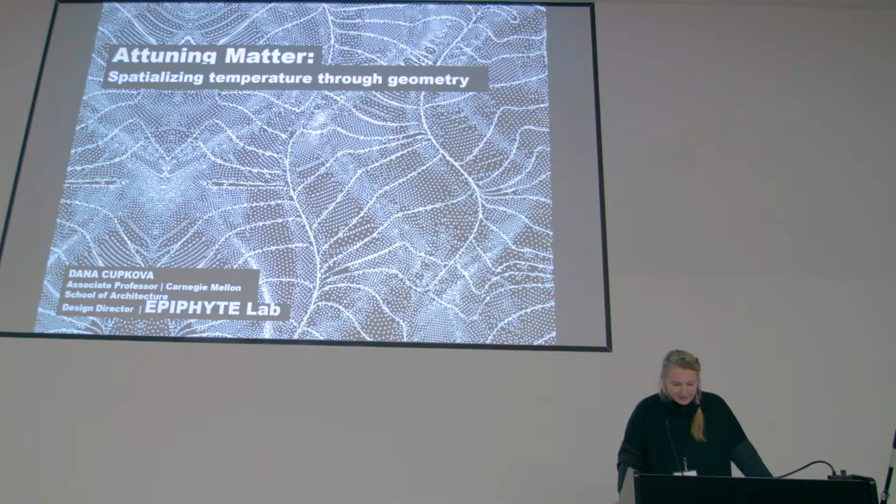I'll be talking about attunement through low-tech materials, thermal perceptions, and all things non-kinetic, just for change. I'm an architect, a designer. Concurrently with my academic position, I ran a practice, a design research collaborative called Epiphyte Lab, which is focused on the design of built environments through the lens of thermodynamic behaviors.

Truly operating between practice and academia, there is a structured yet slightly ambivalent relationship between the set of categories that want to engage context through very different formal behaviors, data metrics, and use of code, but vary in scale, type, and materiality.

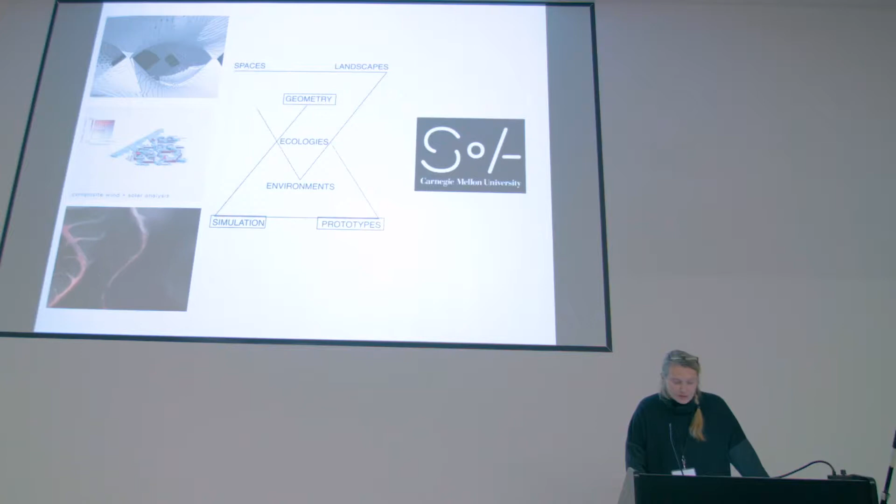On the side of the Epiphyte Lab, we produce experiences and academic research and teaching. We focus on procedures and methods that get us there, but collectively the body of work situates architecture as a kind of ecologically reactive form, primarily drawing connections, relying on simulation, relying on connections between perceptive form and its contingency on invisible forces.

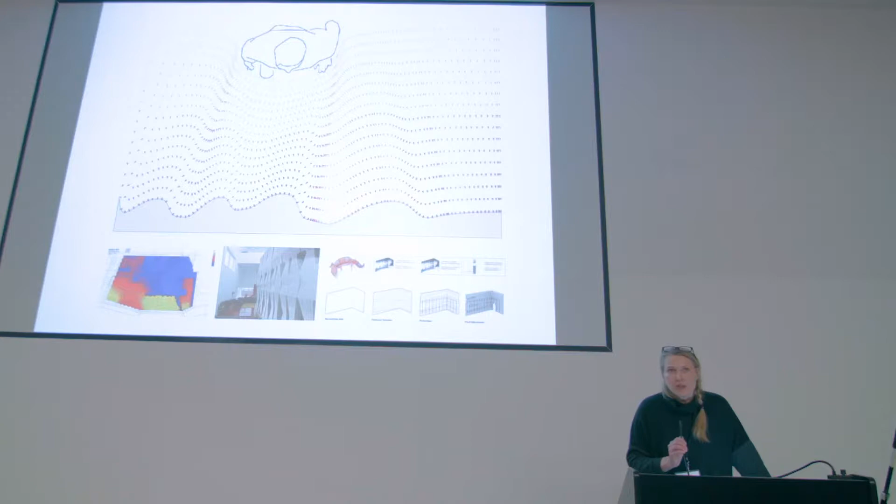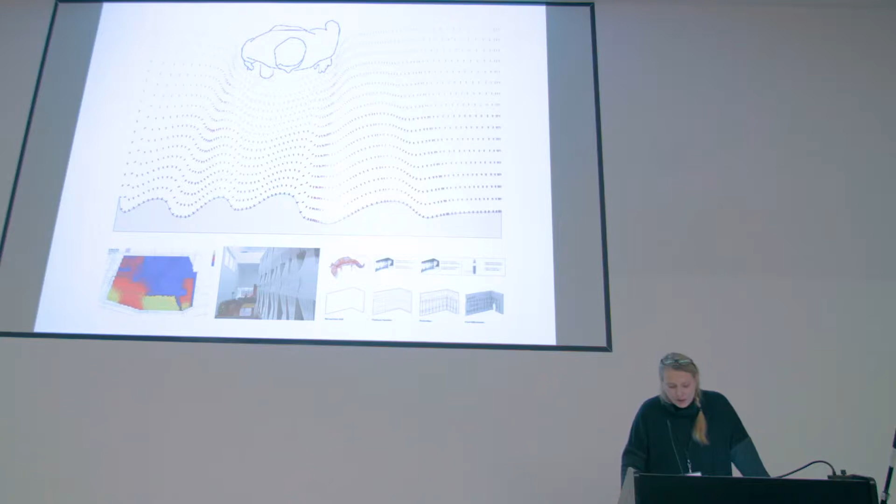Focused on energy, and energy is both empirical and perceptive. My work really looks at a definition of thermal comfort away from the industry standards that are underlined by engineering of mechanized building systems, and looking towards the capacity of architecture to trigger these perceptions through subjective experiences.

Thermal comfort is an engineering term which is based and calculated on a metabolic rate of humans. So we're already using these standards, like ASHRAE thermal comfort, which is based on scientific research into the human body. Yet, unless you are a 40-year-old white male, the building is really not designed for you. It doesn't care how you feel.

In terms of the preconceived ideas about how building systems are integrated, which Axel talked about a little bit, it's highly problematic.

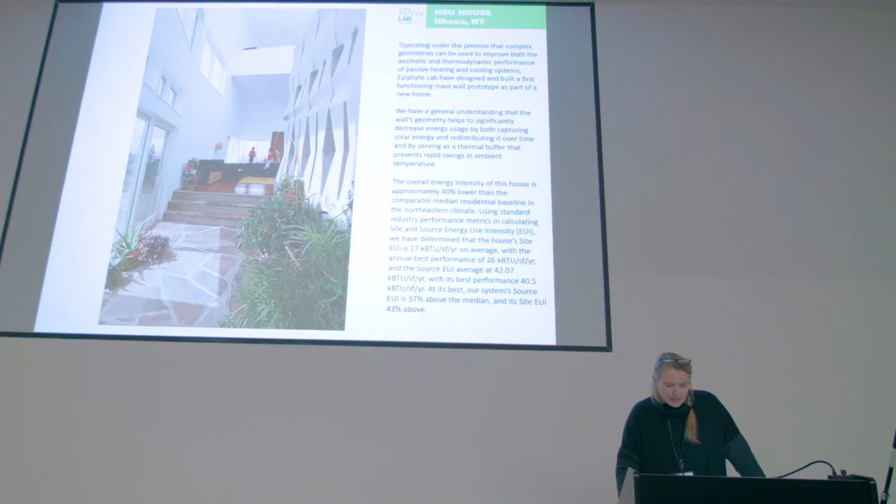This is a 9-year-old project now, HSU House, that originally served as a proof of concept and jump-started a lot of my currently funded research, primarily with industry. That looked at geometrically actuated thermal mass. This is a house which has no mechanical air conditioning, and it's cooled passively through this chunk of concrete. Ironically enough, we got a lower LEED rating for this one because we had no innovated air conditioning. That was quite interesting.

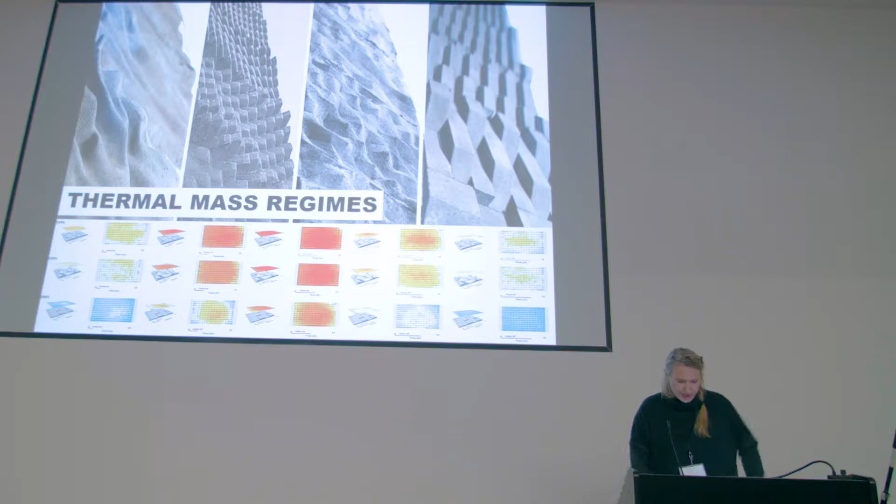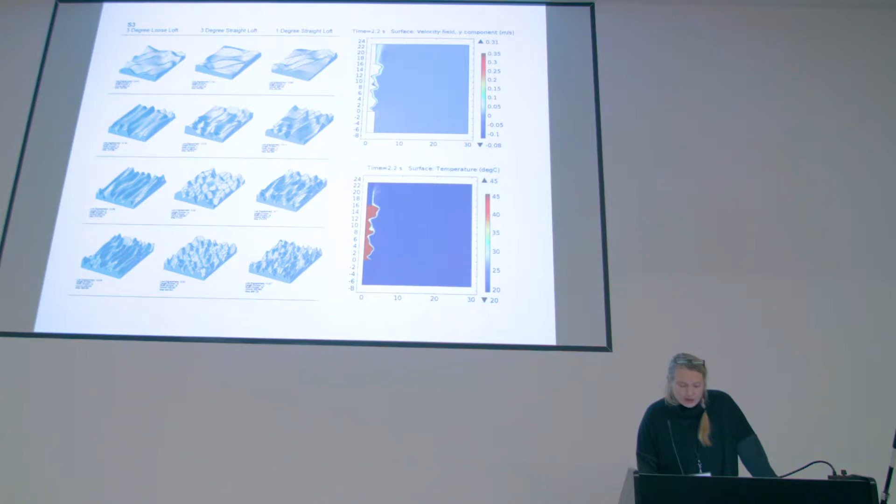So it led me to this idea that surface figuration is a significant factor in thermodynamics of passive building systems, primarily due to convection. This has been published, so I'm not going too deep into it, but through both simulation and physical testing, we're able to isolate the heat transfer coefficient of these different shaped surfaces based on geometry.

So I'm able to start associating the currently engineering method of looking at thermal mass, which doesn't really take shape into account, or a lot of the simulation, energy-based simulation, which don't take shape into consideration.

We were able to determine a basic rule set for geometrically actuated time lag that would have significant effect on environmental dynamics in regard to decreased reliance on mechanized environments.

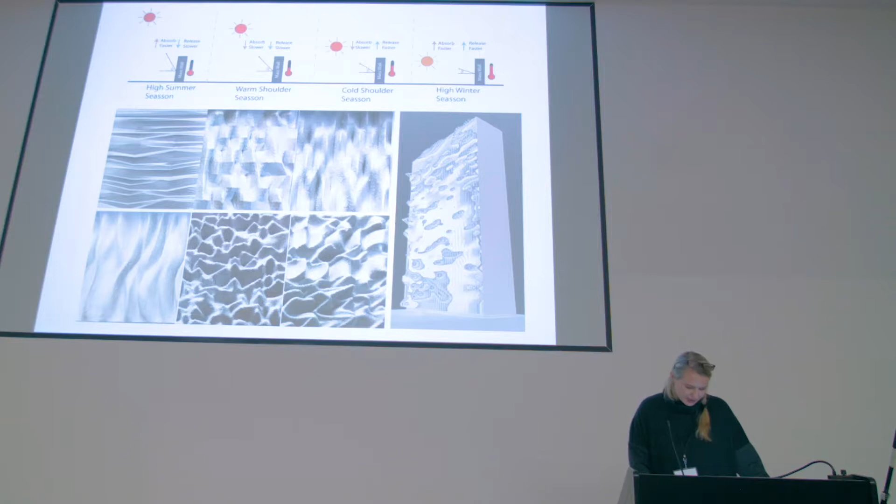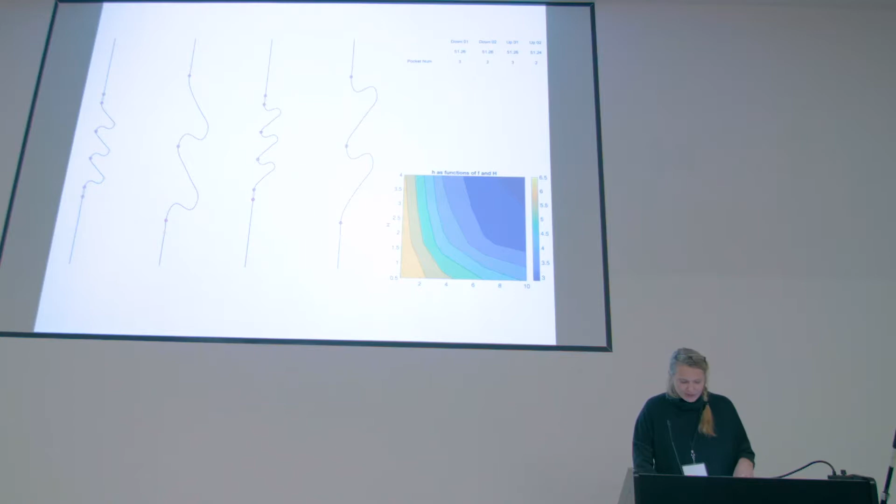Now we have the ability, and this is a new venue, to start identifying these figures and geometric trends, which there's a lot of information about, and assign them a potential thermal value, doing some statistical analysis to start generating new sets of geometries with desired thermal lag and a new set of tactile experiences. This is a new line of inquiry, where we can use machine learning as a way to start projecting some of these performances.

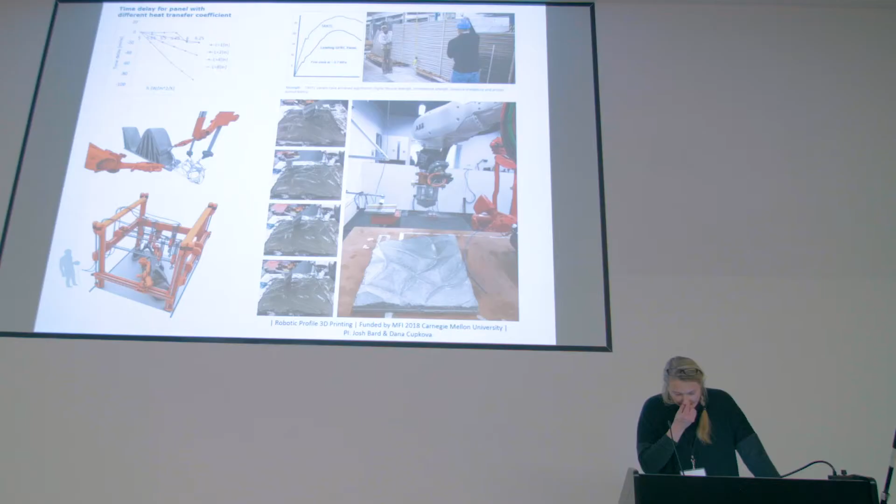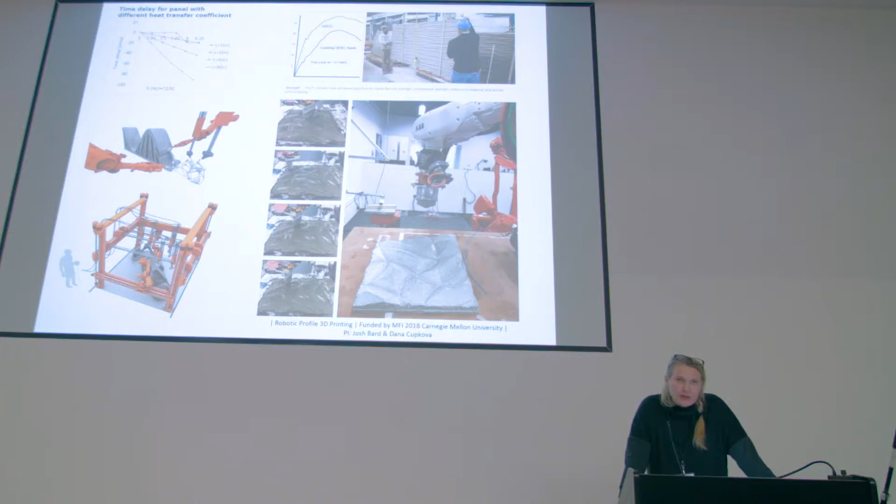This is a little bit of an ode to concrete. As you know, manufacturing of concrete has the biggest effect on carbon production and greenhouse gas production.

We collaborate with industry quite a bit. We have manufacturing innovation funding from Carnegie Mellon University. But what's ironic about concrete is that it essentially has one of the most benign embodied energy footprints on carbon per unit of material.

The main culprit in this whole problem is the cement. So we're starting to look at the holistic production of material mixtures and demolding the process of fabrication within some of the industry partners we're dealing with, so we can have a much greater impact in terms of the industry itself.

This nuanced understanding of surface tactility and thermal choreography offers two lines of material research of architecture as it relates to both ecology and technology.

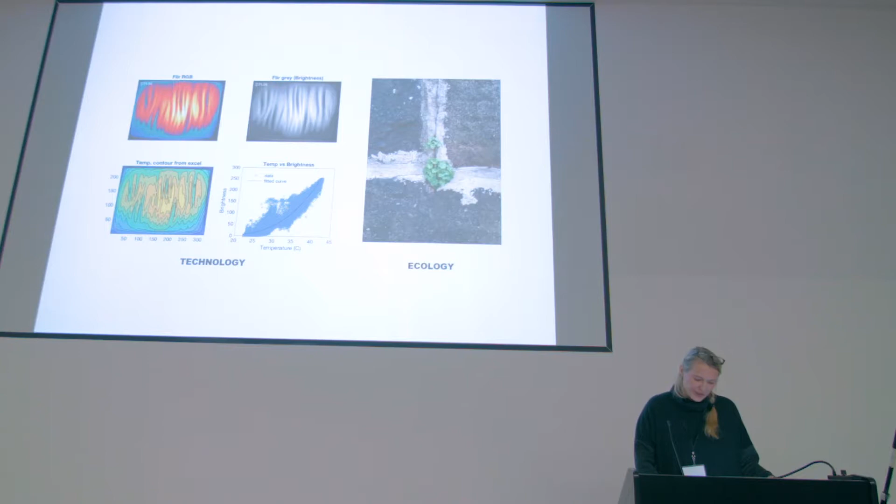So from outside in, there's a sort of opportunism of existing phenomena related to material weathering, and a lot of projects talked about this. I'm interested in shifting away from a positivist humanist concept of industrialization and investigating modes of ecological disruption into new material modes.

This is also in the context of one of our manufacturing industry partners. Their main production or research effort really goes into trying to prevent these situations. So the whole idea is, how do you start engineering materials that enable completely different kinds of porosity, ingredients, ductility, different intelligence about aesthetics, biodegradability, and a holistic ecological experience for large-scale buildings.

So that's sort of an outside-in approach. And from inside out, the other inquiry engages thermal color as a means of communication with environment—thermochromics as well—unpacking ideas of thermal comfort in buildings.

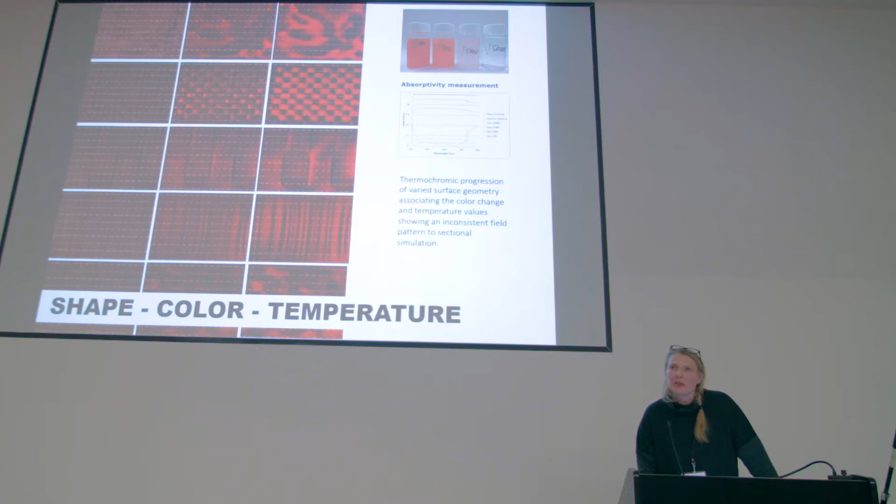The focus is really on reactive surfaces and thermal communication, proposing thermoregulation to allow architecture to operate more as a mood ring. This goes back to the idea of mechanized environments—rather than an optimized engineering system, how this can be an overlay of previously passive geometries together with these active thermal networks.

There's a possibility to create pathways and embedded connectedness to specific forms of biofeedback. This is a very interdisciplinary research agenda, using human physiology and emotiveness as a way to react or communicate with the environment itself and inform the design of material expressions.

This is a little corny, but it's a projecting of these scenarios related to human presence and a state of mind into the materiality of surfaces and spatial character.

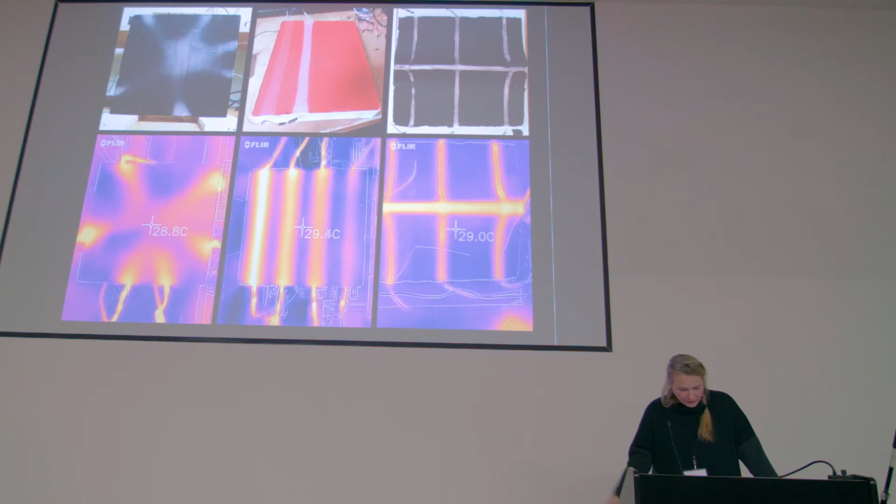This is our first functioning prototype—a piece of concrete using thermochromics and heated pathways. We're looking at a different way of producing these distributed control systems, which allowed us to set up a hierarchy of testing procedures and modeling workflows.

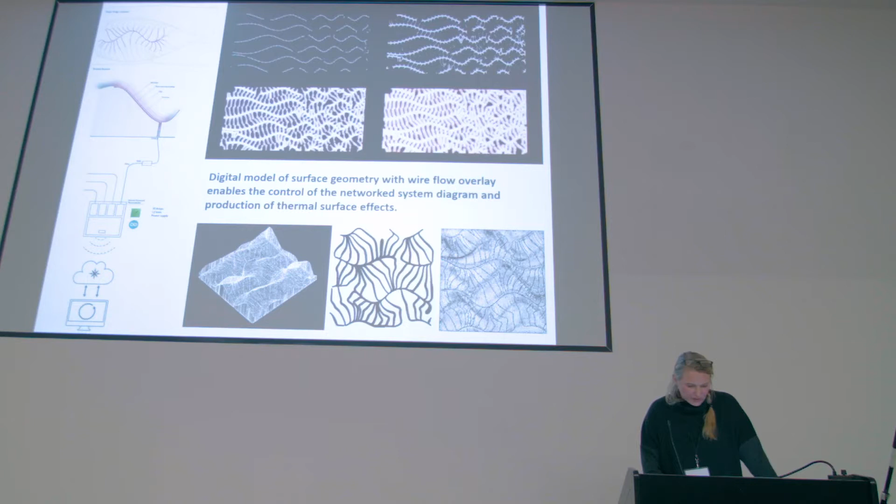This lets us simulate changes in microclimate in response to human thought, and produce more robust proof-of-concept pieces using thermochromics and programmable electromechanical controls to affect surface temperature and tactility, using a distributed matter and sensory effect rooted in thermodynamics.

This is the final prototype we currently have. The thermal pathways are currently programmed, and we're still working on this as the second part of the research—taking on the method for communication and actuation of the system.

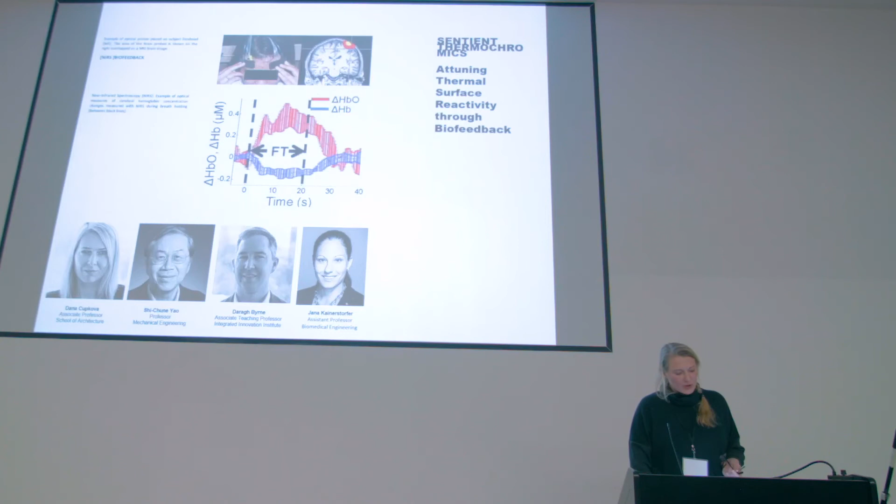Essentially, if I have 3 tiles as a thermal mass system, like the building we built a while back, and I measure their rate of heat transfer, the geometry completely changes the heat transfer. I can shift the lag by 3 hours just through the geometry.

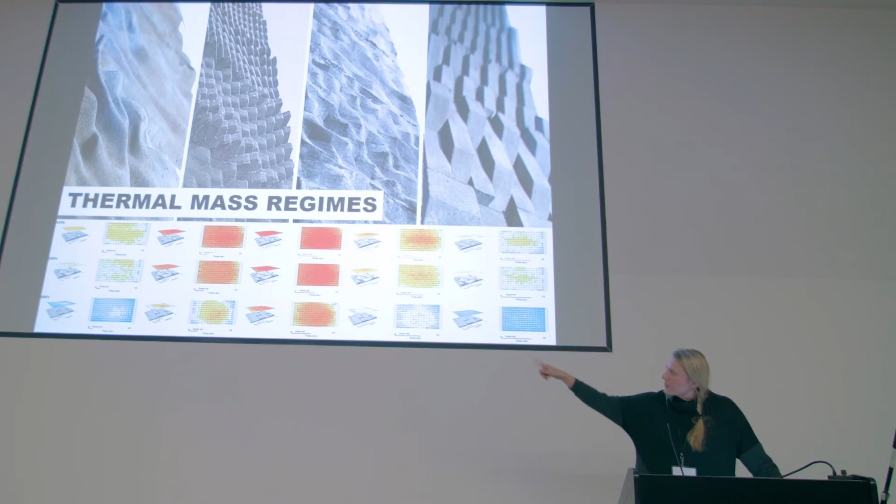So the geometry itself—these are thermal maps of 3 tiles, a visual comparison very early on, this is from 2014 I think. Those were physical experiments where we measured the daily cycle and rate of heating and cooling.

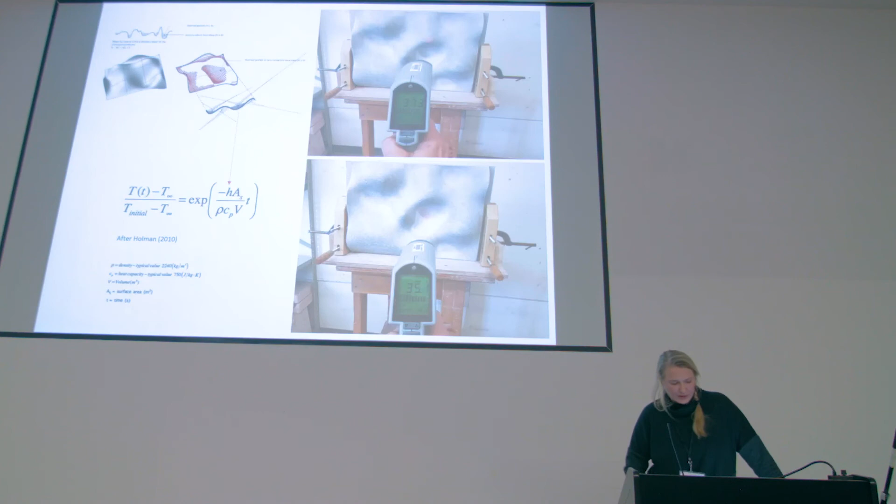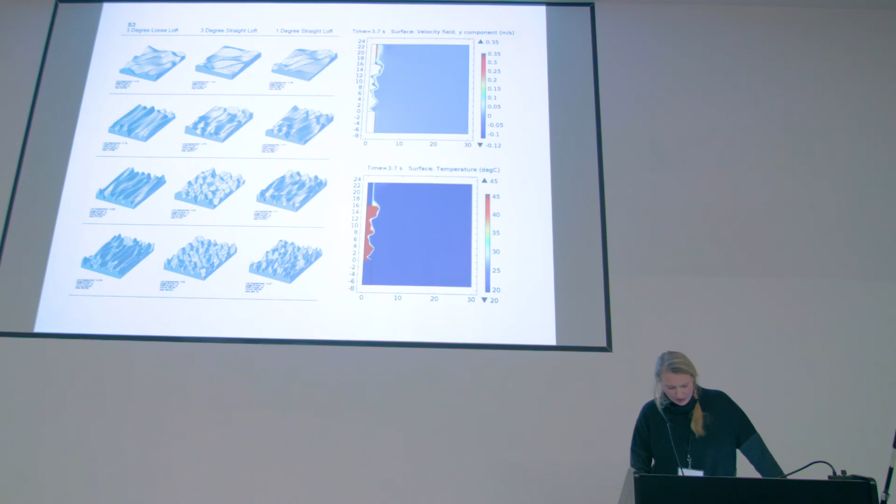So the geometry itself matters because of convection. I have this whole theory of a thermal pocket, where we're essentially looking at geometry—we have a way of looking at geometry and predicting to some degree the way it's going to behave. This is part of the measured experience.

A lot of this comes from the bigger ambition of thinking about Frank Lloyd Wright's textile block houses, the cradle-to-cradle resource material. 30% of the world is climatically and materially positioned so that this idea of earthen materials and construction with no mechanized system is completely possible and feasible.

So we're looking more into these low-tech ways of thinking, using technology as enabling and accessing this at a large scale. Geometry is a pretty big factor in that as well. Thank you so much.